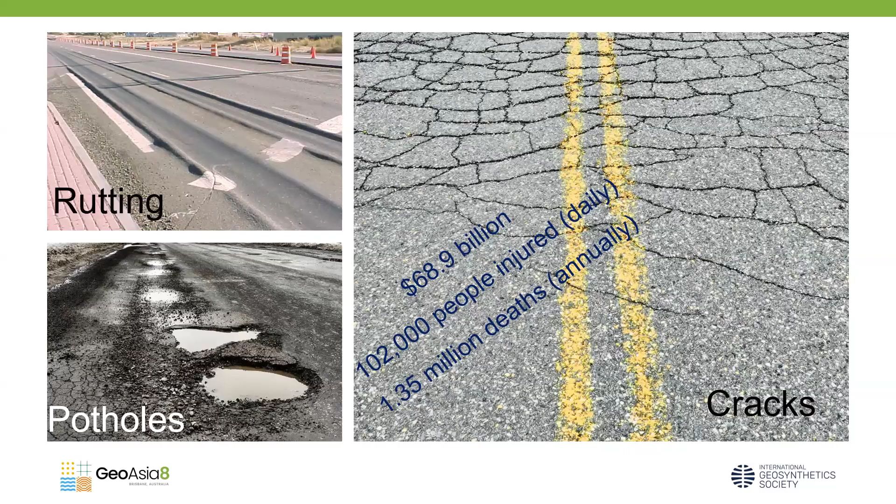And we, as engineers, have taken this responsibility to reduce this number so that people can save their life. Moreover, people can drive on these roads safely as well as comfortably without causing any issues to the riders.

So just to give you a brief idea of what people do when a road is disintegrated or deteriorated: whenever a road loses its structural capacity, a crack starts appearing on its surface. In order to rehabilitate the road, people don't go for reconstruction. What they generally do is just put a new layer of road, again an asphalt layer, on top of the cracked surface.

If you see this figure, you can clearly see that the cracks which have already been created in the existing pavement try to propagate into the overlay once the load starts coming on the newly constructed asphalt overlay or the newly constructed top asphalt surface.

So let's say a pavement is redesigned for 5 to 10 years so that it can improve the lifespan of the pavement by 5 to 10 years. But because of this movement or propagation of cracks from the bottom asphalt layer to the overlay, your road now fails within 3 years, or sometimes even in only 2 years, which causes a lot of problems for transportation engineers, because now they have to reconstruct the road again. Moreover, they have to use a lot of natural resources, which ultimately leads to unsustainability.

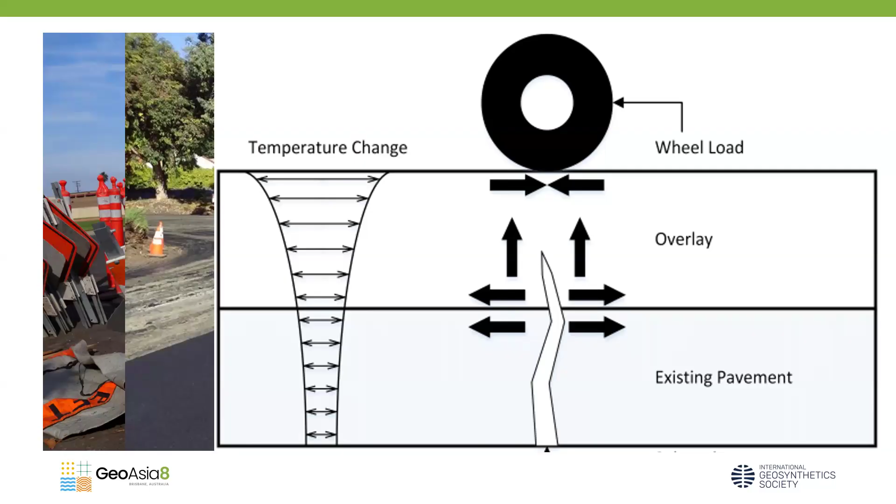So the process which actually leads to the propagation of cracks from the bottom asphalt layer to the overlay is called reflective cracking. This is the term that you might have seen a lot in research articles, as well as heard a lot from transportation engineers, who always say that because of reflective cracking, the quality of the road has disintegrated within a shorter time frame than they had actually designed their pavement for.

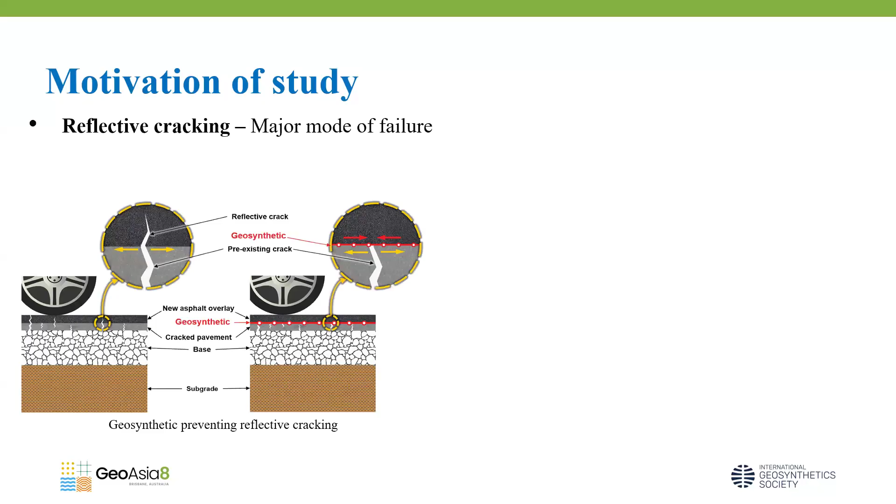So the motivation of this study actually comes from looking into reflective cracking, which is the major mode of failure. And in order to prevent reflective cracking, a lot of work has been done in the past, which includes increasing the asphalt layer thickness so that you can delay reflective cracking, or altering the asphalt mixture composition.

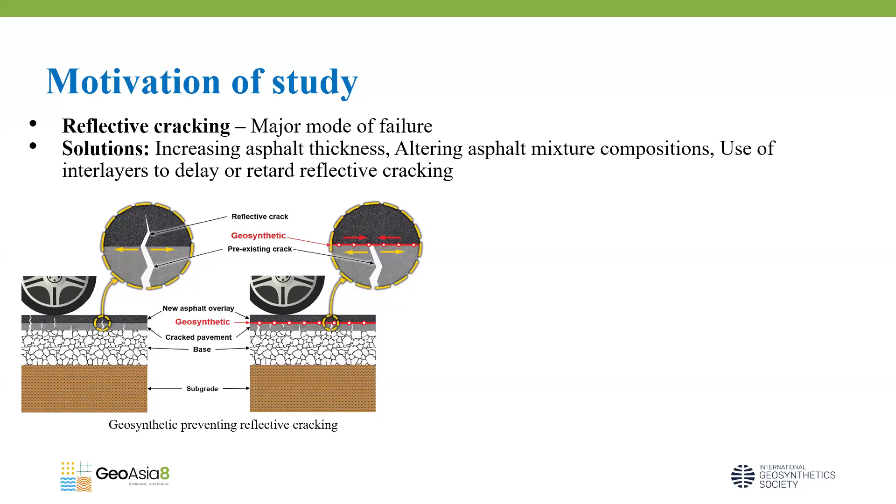Or you can use geosynthetics or paving interlayers between the bottom asphalt layer, or the existing pavement layer, and the overlay, so that you can retard reflective cracking in your pavement. The most common types of geosynthetics generally used in asphalt layers include paving fabric, which is like a geotextile, or paving grid, which is like a geogrid, to provide reinforcement.

So there are 4 different mechanisms which actually lead to reflective cracking in your overlay. First is, of course, the temperature. Asphalt is a viscoelastic material which swells and shrinks depending on temperature rise or decrease. So as the temperature increases or decreases, stresses concentrate at the location where the cracks have already been initiated, and once the swelling and shrinking starts in the asphalt layers, they try to create propagation of cracks into the overlay.

Similarly, because of the wheel load, when a wheel is moving on top of the asphalt layer, as the wheel approaches the crack, shear stresses are generated at this location. Once the wheel is directly on top of the crack, it leads to bending of the asphalt layer, ultimately leading to bending stresses at that location. Finally, as the wheel moves away from the location of the crack, shear stresses again generate in the asphalt layer, which ultimately leads to reflective cracking in your pavement.

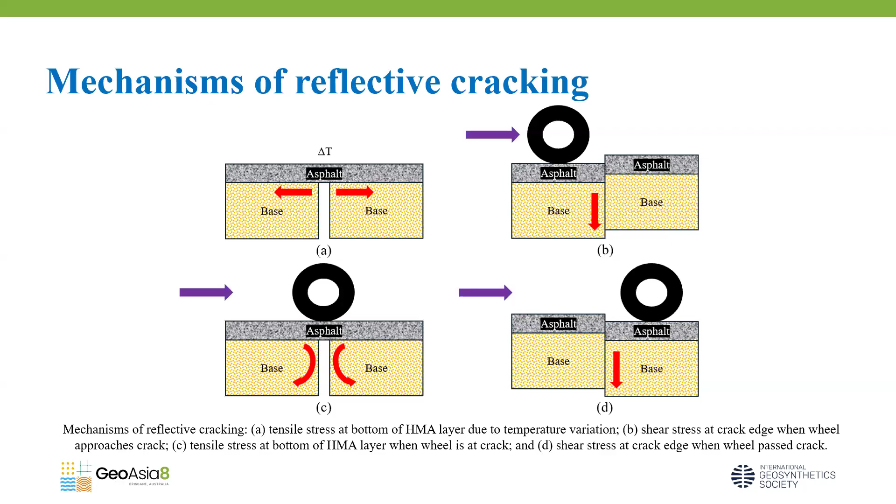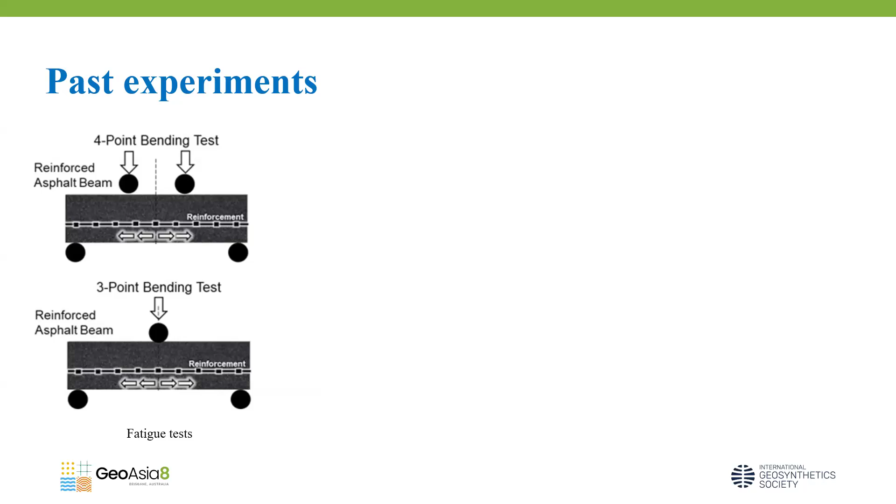So people in the past have developed a lot of tests. In your undergrad, most of you might have heard about the 3-point beam test and 4-point beam test, which are the most common tests conducted in pavement engineering in order to see the bending stresses at the bottom of the asphalt layer, which ultimately lead to reflective cracking.

Similarly, plate load tests have been conducted in the past by a lot of researchers in the field to see how the cracks propagate into the overlay. In addition, direct shear test and interface bond strength test are some of the most common tests to see the benefits provided by geosynthetics in asphalt layers.

So people have mostly studied the temperature-induced impact as well as reflective cracking caused by bending stresses or flexural loading. But almost no research has looked at whether geosynthetics can provide benefits under shear loading on asphalt layers, because as shown in our previous slide, shear loading happens almost two times whenever a single wheel pass occurs on a cracked asphalt layer. This plays a very important role in propagation of cracks into the overlay, but none of the researchers have looked into it in detail in the past.

That's what we are looking into in our research in this presentation today. The research gap we found is that limited research has been conducted where shear loads have been applied perpendicular to the reinforcement plane. Our objectives are defined such that a new test setup is developed, known as the cross shear test setup, which you will see in upcoming slides.

The setup was first standardized at different temperatures, strain rates, and interlayer conditions, since it's a new test setup designed by us. We wanted to standardize it so people in the future can use it in their laboratory without worrying about results or repeatability issues. But because of time constraints today, I won't discuss how the standardization was performed. We will just deep dive into the results, showing how geosynthetics provide benefit in mitigating shear loading.

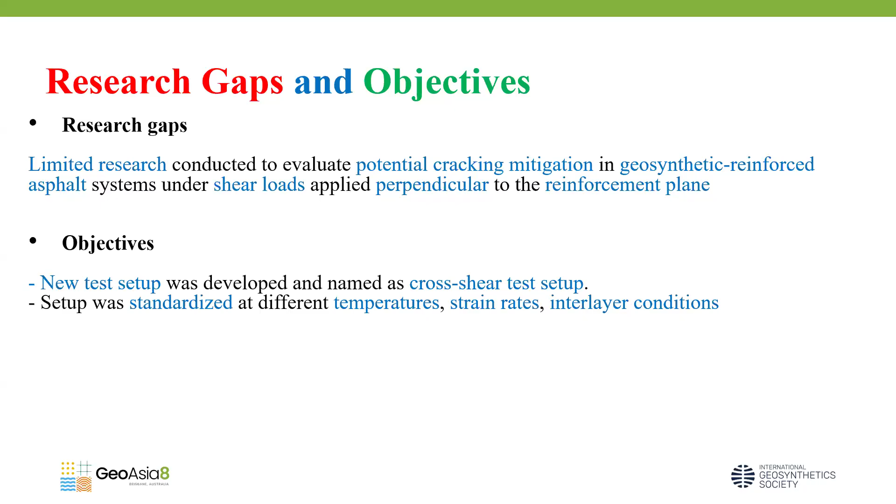Finally, the test setup is designed so it can apply direct shear loading on unreinforced as well as geosynthetic reinforced asphalt specimens. The benefits, or main objectives, are to characterize the benefits provided by geosynthetics when shear loading is applied on the specimens.

The cracking resistance potential improvement is defined in geosynthetic reinforced asphalt specimens under monotonic loading. We did tests under cyclic loading as well as dynamic loading, but because of time constraint, we will discuss only results under monotonic loading today.

And then we will use digital image correlation technique to see what is happening behind the testing we are doing. As a researcher, our task is not just to see the load displacement curve, our task is to find the mechanisms which are actually leading to the benefits provided by geosynthetics. That's our main task in this study for monotonic loading.

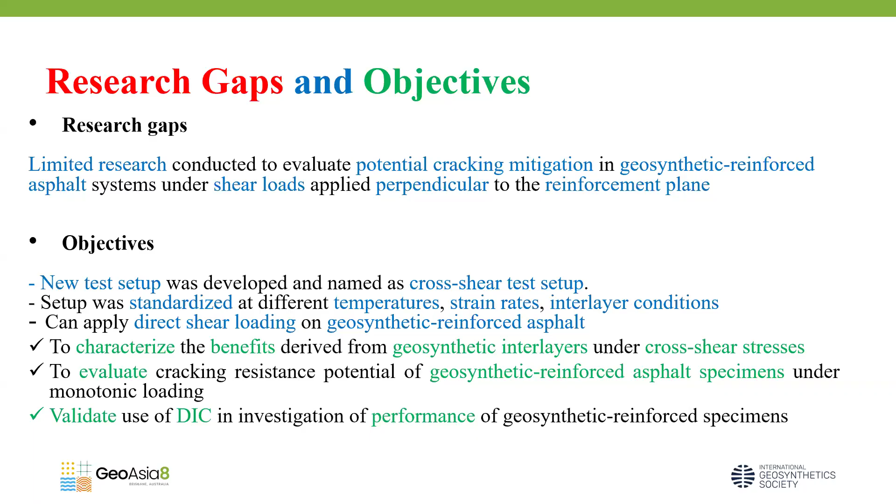So let's move to the experimental program. As you know, asphalt layers require just two things: first is your aggregate and second is your binder. The aggregates used in this study satisfied the TxDOT, Texas Department of Transportation, asphalt mixtures requirement, and the binder used was performance grade PG64-22.

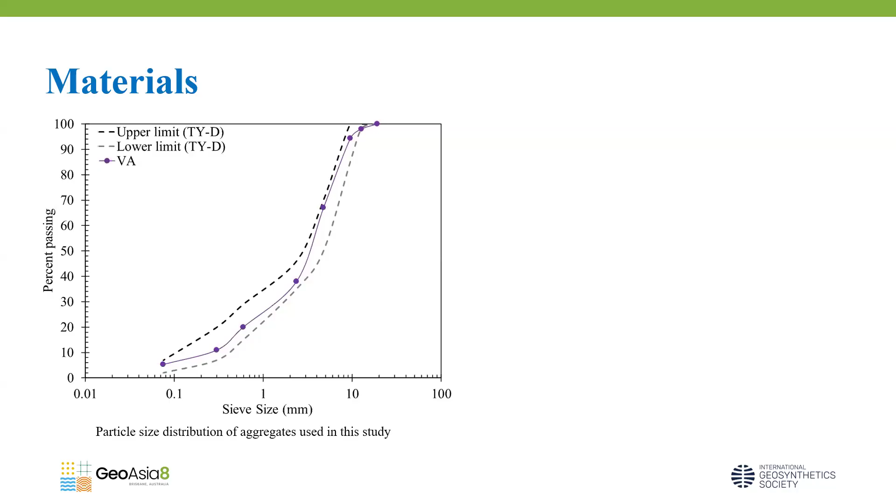I know in some countries we still use penetration grade to classify binder, but in the US, since performance grade is the most common one, that's why we used PG64-22. Three different types of geosynthetics were used in this study: polyester geogrid composite, polyvinyl alcohol geogrid composite, and fiberglass geogrid composite.

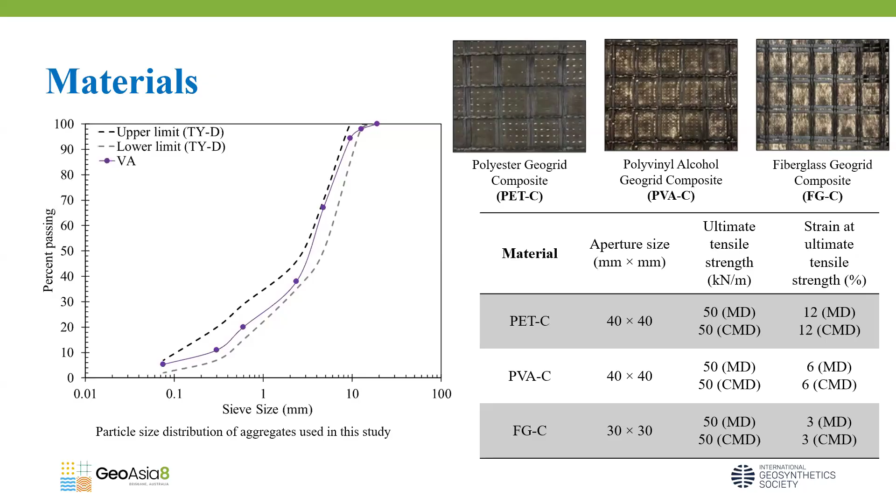The properties of these geosynthetics can be found here. As you can see, the ultimate tensile strength of all the products is almost similar. However, the strain at which these materials failed was completely different, which affected the stiffness of the products used in this study. That's why the results are going to differ, as you will see in upcoming slides.

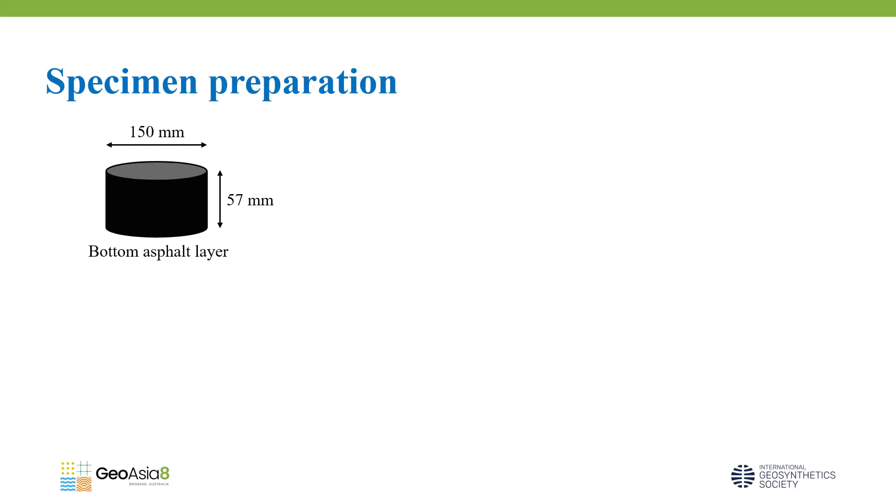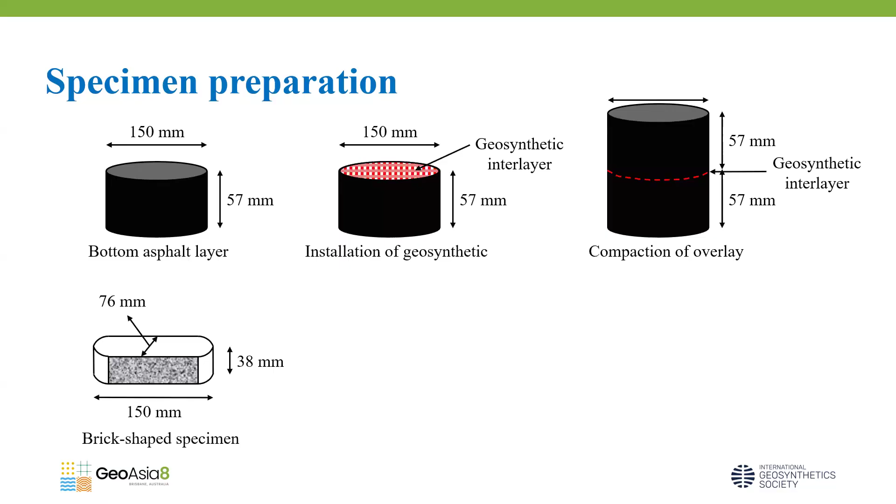Regarding specimen preparation, everything was prepared similarly to how asphalt layers are generally prepared in the field. First, the bottom asphalt layer was prepared using a Superpave gyratory compactor, with dimensions of 150 mm by 57 mm, followed by tack coat application and geosynthetic interlayer installation in case of reinforced asphalt specimens. Finally, the top asphalt layer, or overlay, was constructed on top of it. Since this prepared sample cannot be used to directly apply shear loading, it was trimmed into a brick-shaped specimen with dimensions of 150 mm by 76 by 38 mm.

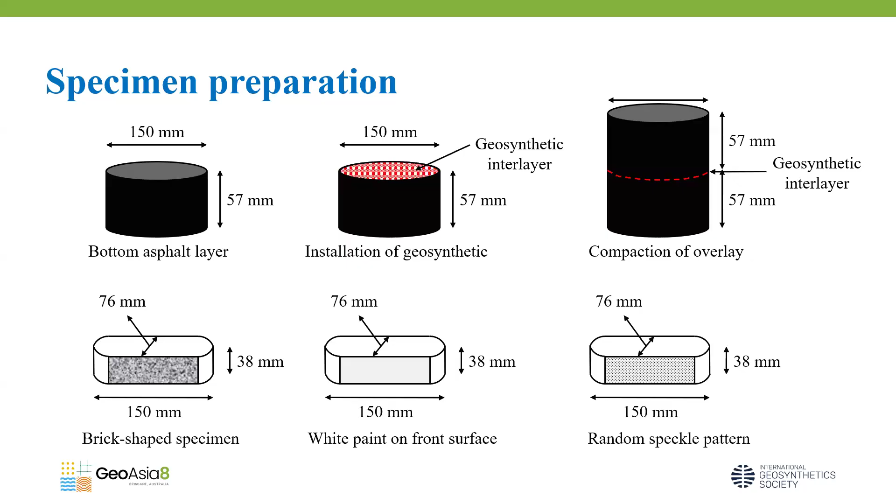Finally, to perform digital image analysis on these specimens, the front face was painted white and then a random speckle pattern using black dots was created on the front face, so that images of this random speckle pattern can be collected and compared with the undeformed image to see how stresses and strains are generated in our specimens without even touching the specimen.

A lot of trial and error has been performed on this setup before calling it one of the best setups for evaluating the shear resistance of geosynthetic reinforced asphalt specimens. You can read more about that in one of my papers on standardization.

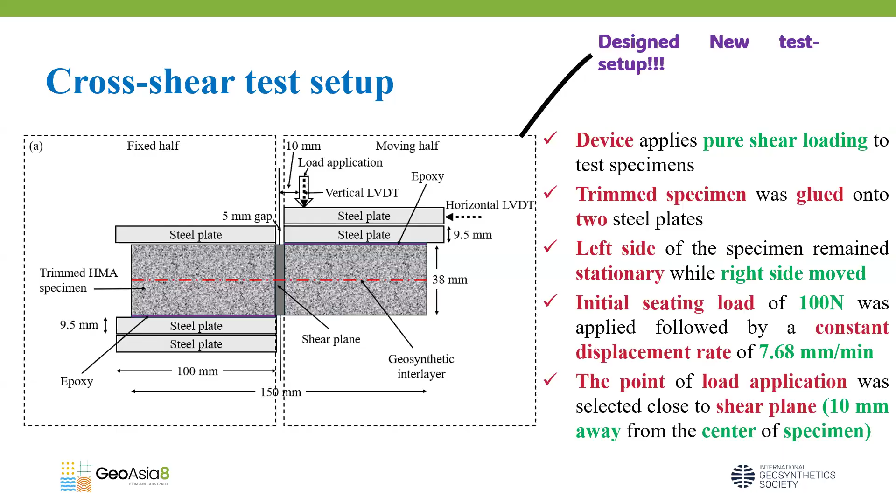The initial seating load for monotonic loading was kept at 100 Newton, while a constant displacement rate was applied on these specimens at about 7.6 mm per minute. The point of load application was also chosen at about 10 mm away from the center of the specimen.

For the digital image correlation technique, as you can see here, the specimen has a random speckle pattern on its front face. We used an open software called DigiCam Control software to collect images at regular intervals of about 3 seconds.

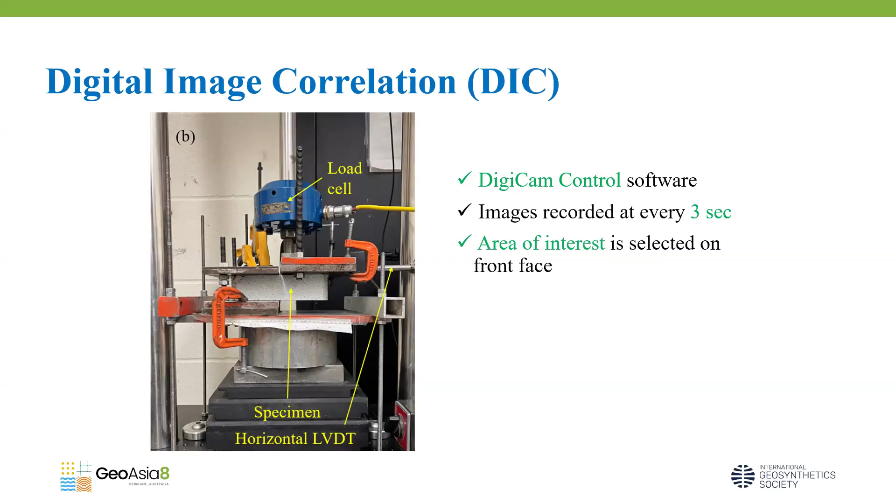If you want to repeat these tests in your laboratory, you can change the recording time by 1 second as well. The area of interest was chosen on the front face of your specimen, and then a commercialized software called Vic2D was used to analyze the images.

If you are a geotechnical or transportation engineer planning to use DIC and you do not have a commercial software available, you can use an open software called NCorr. So there are both open and commercial software options available to analyze all these images.

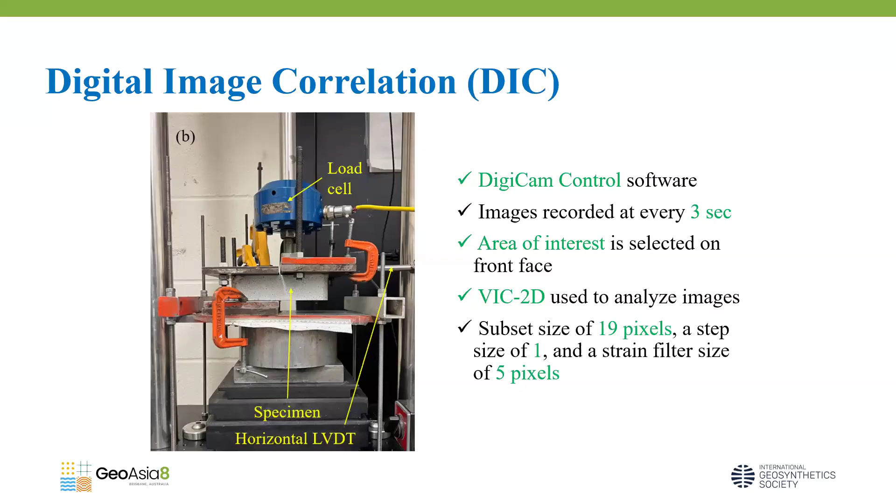In my case, I used a subset size of 19 pixels, a step size of 1, and a strain filter size of 5 pixels. A subset size means your image is divided into different pixels, representing the smallest pixel dimensions used to compare your deformed images with respect to your undeformed images, so you can see how much displacement has happened with respect to time or loading.

Now let's move to the results and discussions, now that you understand what the system is and how it works.

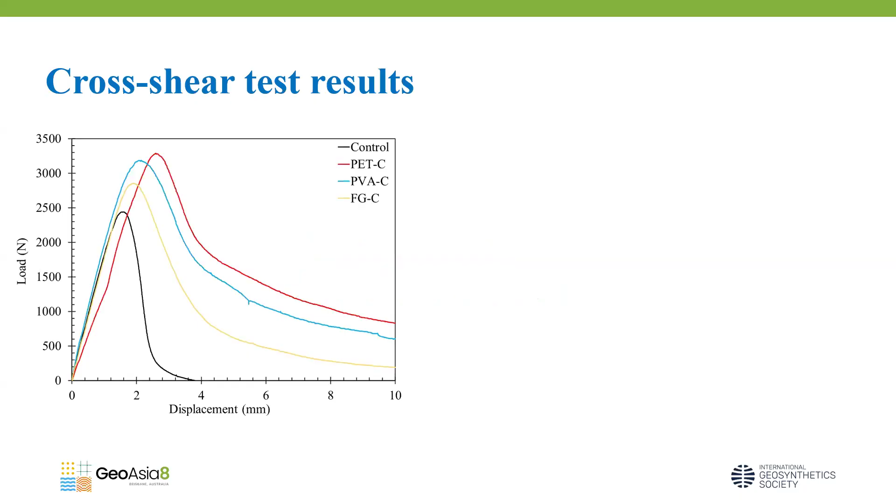So this is the load displacement curve that any engineer needs in the field. All the geosynthetics provided benefits in improving the load carrying capacity, that is the shear resistance of the pavement, as well as in delaying crack initiation, that is the resistance at the peak load. Then we used some analytical models to verify the benefits provided by these geosynthetics.

Moreover, if you look at the load displacement curves closely, there is some residual strength provided by the geosynthetics, which you won't see in unreinforced cases. In unreinforced cases, as soon as the crack initiated at the peak load, you see a sudden drop in the load carrying capacity of your pavement, and hence your pavement becomes unusable.

But in geosynthetic reinforced asphalt specimens, the benefits are still there once the crack has initiated, and you can take advantage of this mostly in colder climates. When the temperature is super cold, the asphalt is strong but brittle in nature, so the asphalt layers crack suddenly, but if they have geosynthetic in them, the crack is dissipated over a longer period of time.

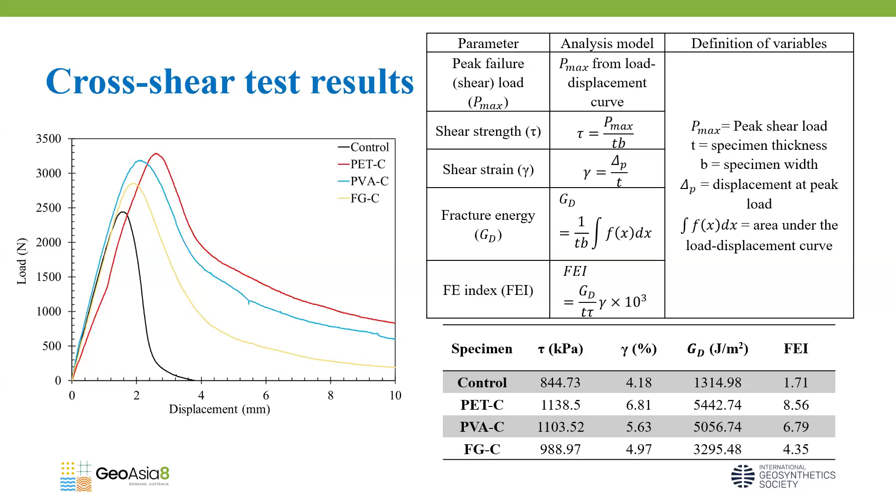Moreover, even after the crack has initiated, there is some residual strength in your pavement that can take the load coming from the wheels on top of it.

If we go to the DIC analysis in order to see the mechanism behind it, I will show you the area of interest that we selected on our images.

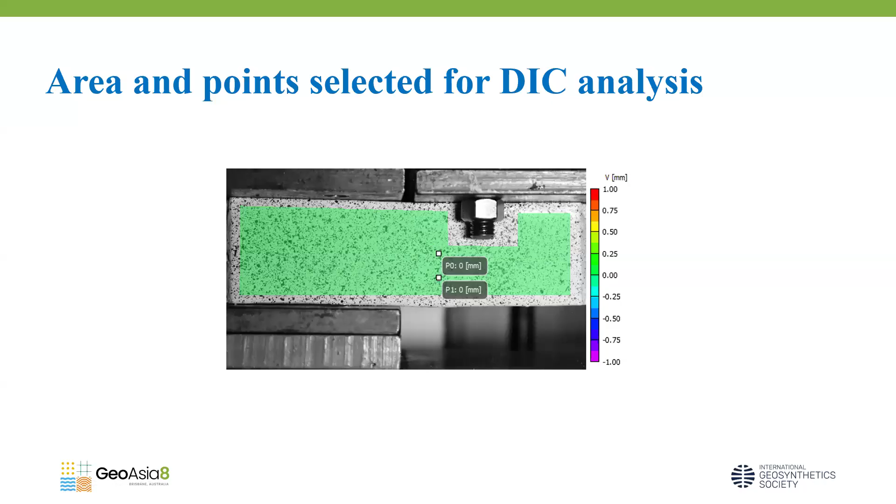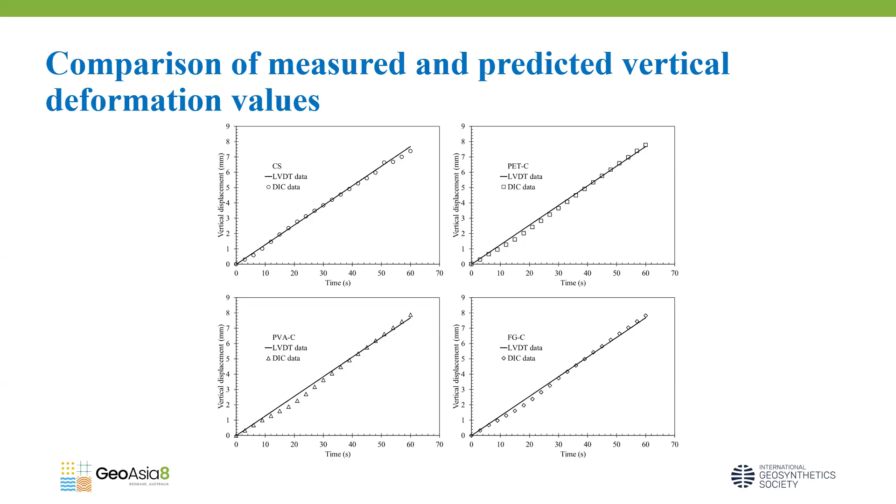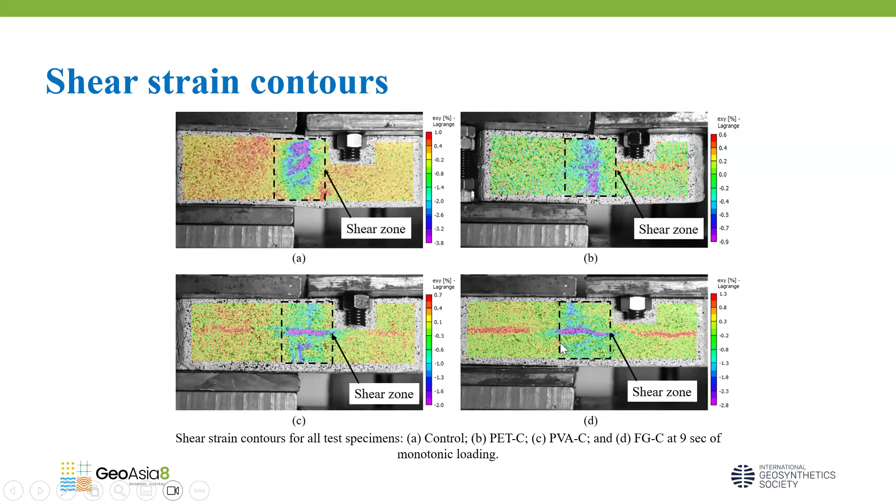Why am I showing you the results at 9 seconds of monotonic loading? Because in the next image, the control specimen was broken completely, so I'm showing all images at 9 seconds. In reinforced specimens, no crack has been initiated. At 21 seconds of monotonic loading, the control specimens are completely fractured, but in reinforced specimens the crack has just initiated. So both crack propagation and crack initiation are delayed by the presence of geosynthetics, which is a great benefit under shear loading.

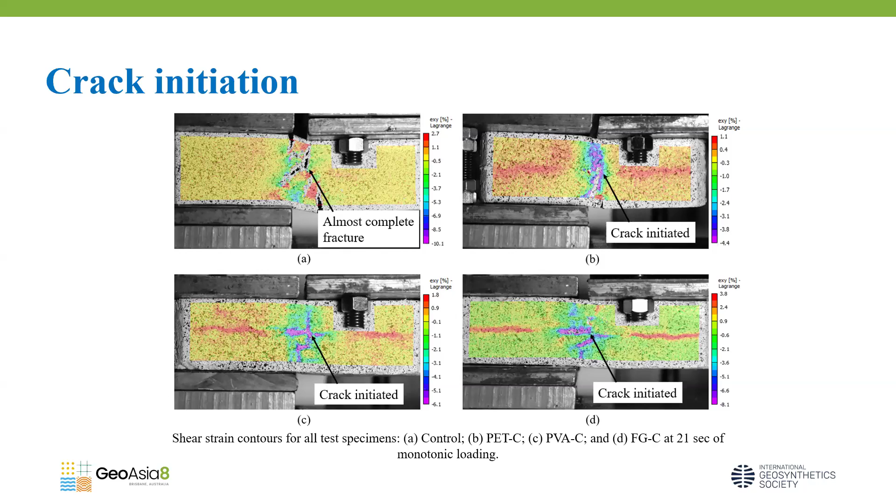Looking at crack propagation, in control specimens the crack initiated either from the top edge or from the bottom of the specimen and then propagated toward the center. But in reinforced specimens, because maximum shear strains are generated along the geosynthetic location, the cracks initiated at the center location and moved away toward the edge of the specimen.

This has another benefit: when a crack initiates from the top, moisture infiltrates into the pavement and damages it rapidly. Similarly, if the crack initiates from the bottom, it travels toward the top very quickly and damages the pavement within a short time. But when the crack initiates from the center location where the geosynthetic is located, you now have enough time to repair your pavement or even delay its complete failure.

So these are the benefits provided by geosynthetics, and the mechanism we found from these images is that geosynthetics mobilize or absorb the strain coming onto them and redistribute it over a wider area, thus improving the shear resistance of the pavement.

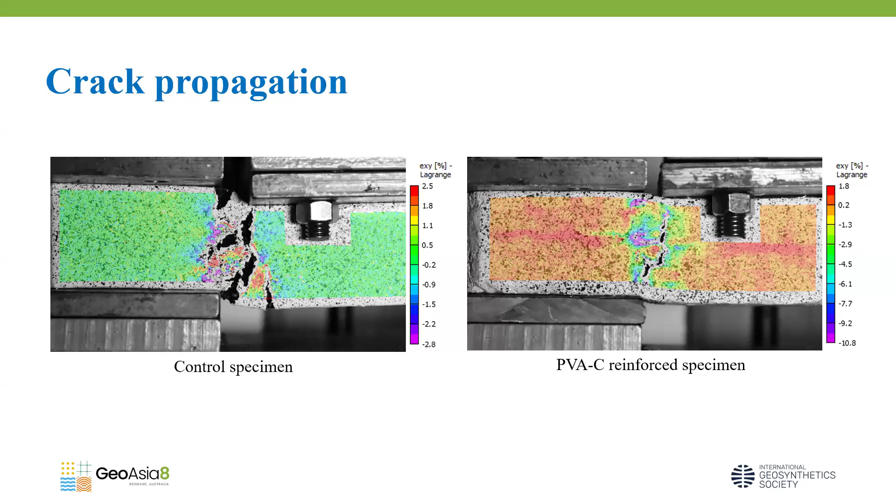So from this study, we can conclude the following points.

The cross shear test has demonstrated that all geosynthetic reinforcements have provided benefits in improving the shear resistance of pavement. Among the interlayers used, the polyester geogrid composite provided the maximum benefit with a fracture energy index of around 8.56, followed by PVAC and FGC geosynthetic.

The DIC technique was found to be effective in defining the mechanism which ultimately led to the improvement in shear performance of reinforced specimens. In monotonic loading, at 9 seconds of loading, the shear strains were as high as 3.8% in control specimens, while in reinforced specimens they varied from 0.9 to 2.8% only, providing similar benefits to those we have seen in laboratory testing.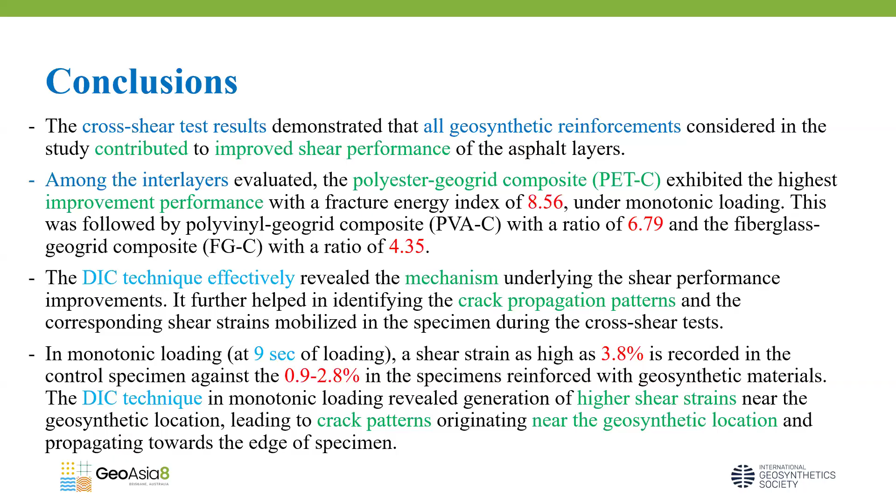The test results indicate that reinforced specimens failed at higher loading time, meaning they needed higher displacement in order to fail, thus delaying crack propagation or helping mobilize the shear stresses coming on the geosynthetic reinforced specimens. So in summary, we can conclude that geosynthetics provide benefits in improving shear resistance, and hence they can be used in the future on asphalt layers to improve structural capacity or to retard reflective cracking in pavements.

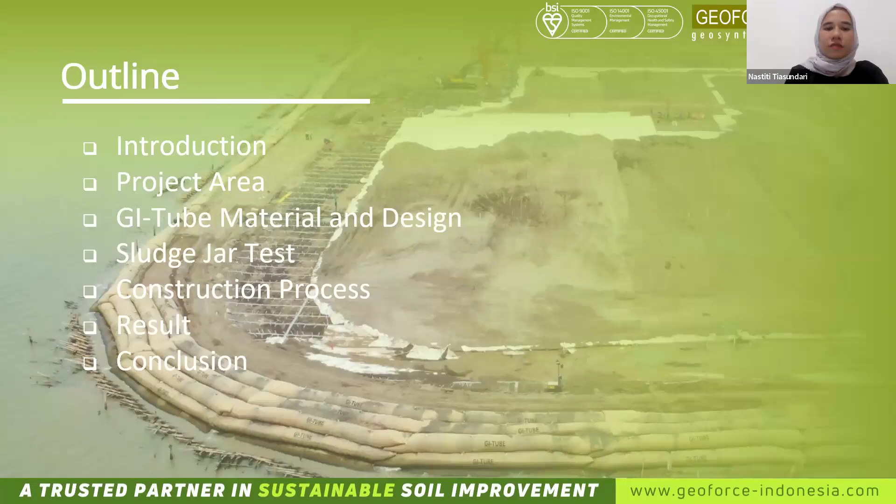As you may all know, Indonesia is a very big country consisting of many islands, approximately 17,000 islands, including major ones like Sumatra, Borneo, Sulawesi, Papua, and Java. Because of that, Indonesia has over 99,000 kilometers of coastline with a combination of sandy, muddy, rock, and other structures, and almost all of them have a risk of coastal destruction due to abrasion. Because Indonesia is a very big country, I'll focus my research on Java Island, which is one of the most populated islands in Indonesia.

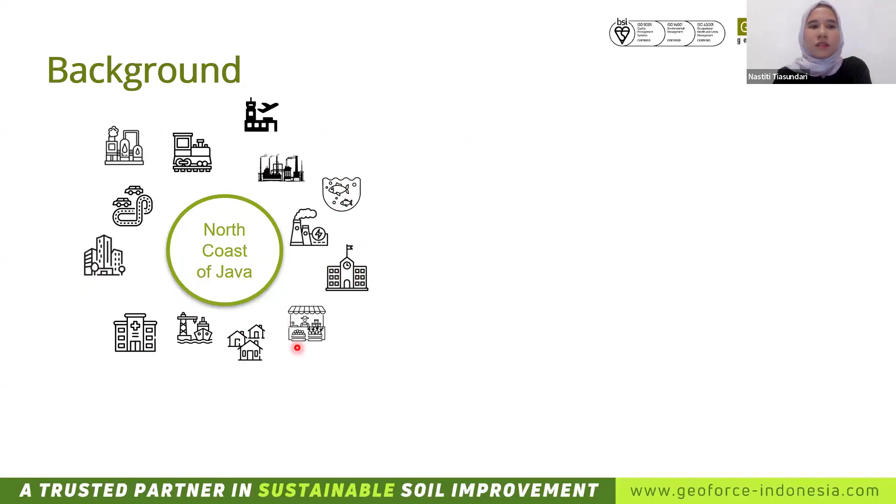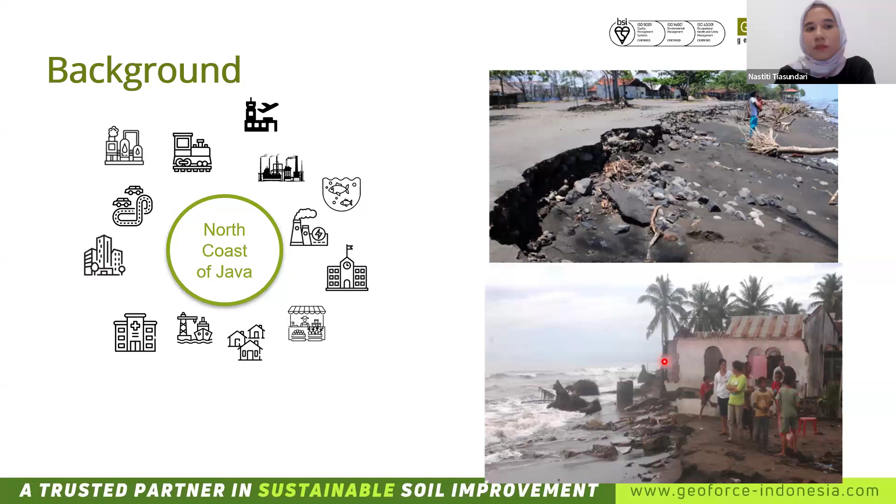So how can we overcome this? Especially, as I mentioned before, there are many types of shorelines, especially muddy coastline, which is well known for its problematic condition because it consists of soft deposits. So how can we overcome coastal abrasion in muddy coastline? Actually, there are many solutions you can do. The first one is making structures like seawalls, breakwaters, groins, revetments, or other structures.

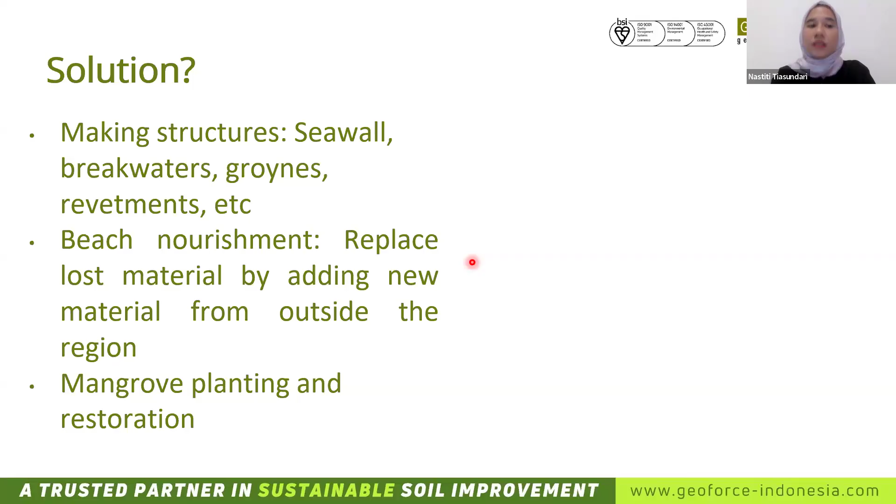The second solution is beach nourishment, by replacing lost materials with new materials from outside the region. The third is mangrove planting and restoration of mangrove forests. But how about a solution that achieves all three things at once, by using GI tubes or geotextile tubes as a low-crested breakwater structure? How is that possible?

And the second thing, we can do beach nourishment. How is that possible? Because the GI tubes serve as a low-crested breakwater, when the high tide happens, the wave will overflow the GI tubes and form deposits behind the structure. The deposits will be trapped and form deposit accretion, resulting in increasing the shorelines. That's number two. We don't need to add new material from outside the region; it actually forms naturally from the process.

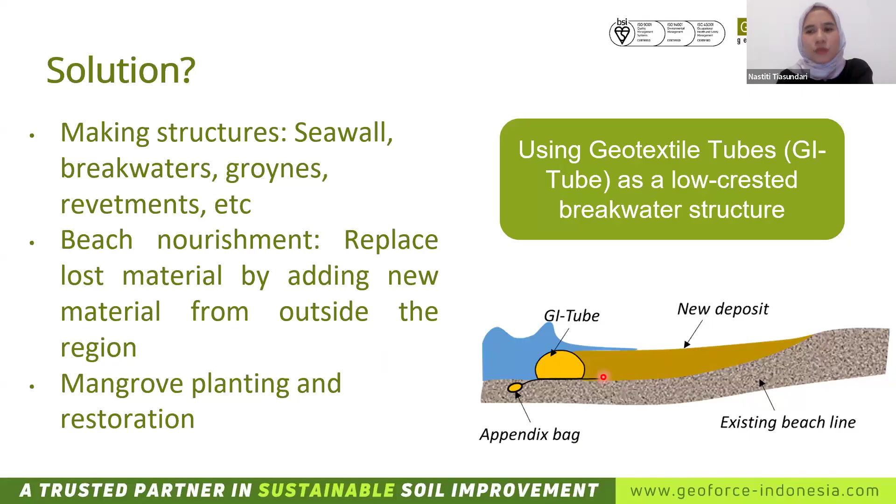And the third, mangrove planting and restoration: because the GI tube serves as a low-crested breakwater structure, it will reduce the wave energy coming to it. So the wave energy behind the structure will be relatively low and stable, making it easier for mangroves to sustain, creating an ideal environment for enhancing mangrove growth.

How are we going to build this geotextile tube structure? Basically, geotextile tubes are made of geotextile material, and you can fill them with any kind of material: sand, slurry, mud, tailings. The ideal material would be sand, because it fastens the filling process, settles quickly, and has less dimension reduction due to settlement, since it's a very ideal material.

But because we are dealing with coastal abrasion on a muddy coastline, it's hard to find good sand for filling, and we'd often need to transport sand from outside the region into the coastal area. Since it's not easy to find sand, we are going to use locally sourced slurry to fill the geotextile tubes. How can we do that?

Slurry consists of small particles of fine clay. You could just fill the slurry directly inside the GI tubes, but this causes a problem: the installation time would be very long, and due to this longer process, a slurry cake will form inside the geotextile tubes. This decreases the dewatering ability, so you won't get the optimum height of the geotextile tubes that you want.

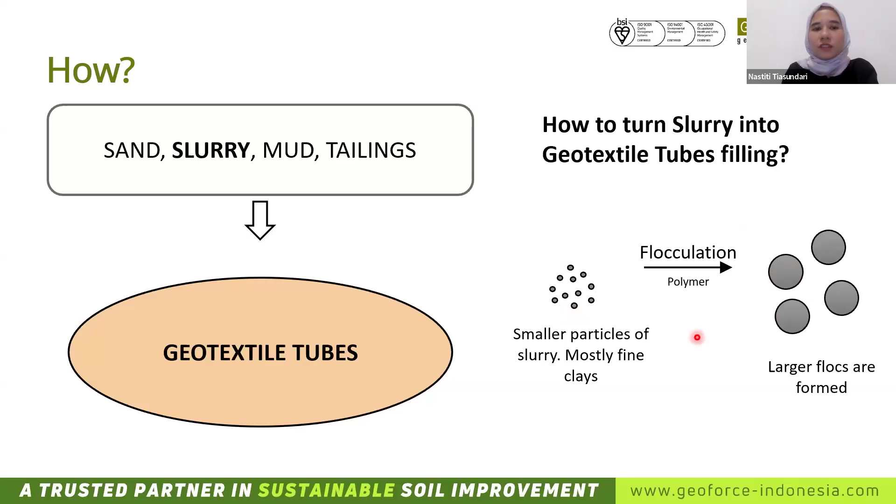So we need to form larger flocs quickly using a flocculation process aided by polymer. The idea is to pump the slurry into the geotextile tubes, but faster, forming larger material by doing flocculation during the pumping of the filling.

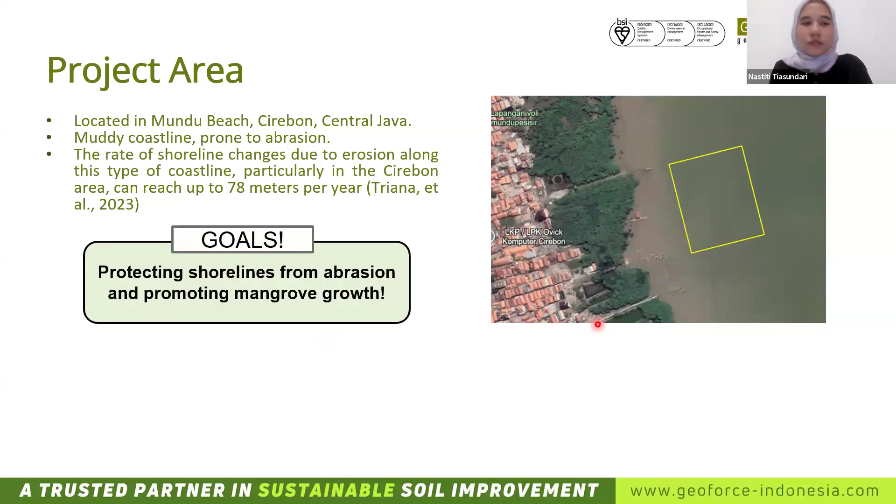So the goal here is to protect shorelines from abrasion while also promoting mangrove growth. The problem is that in this area it's not easy to find good sand as filling material, so we need a solution to fill our geotextile tubes with locally sourced sludge. The solution is sludge-filled geotextile tubes, which from here on I'll just address as GI tubes.

This is the design we are using: GI tubes with a 5 meter circumference and 1.3 meter design height, since it will be filled with slurry. There will be some settlement and consolidation, estimated around 0.4 meters, so the final height is estimated to be 0.9 meters.

This is something you have to predict when using slurry: you won't get the full 1.3 meter design height. You also have to consider the settlement that will happen to the filling inside the GI tubes.

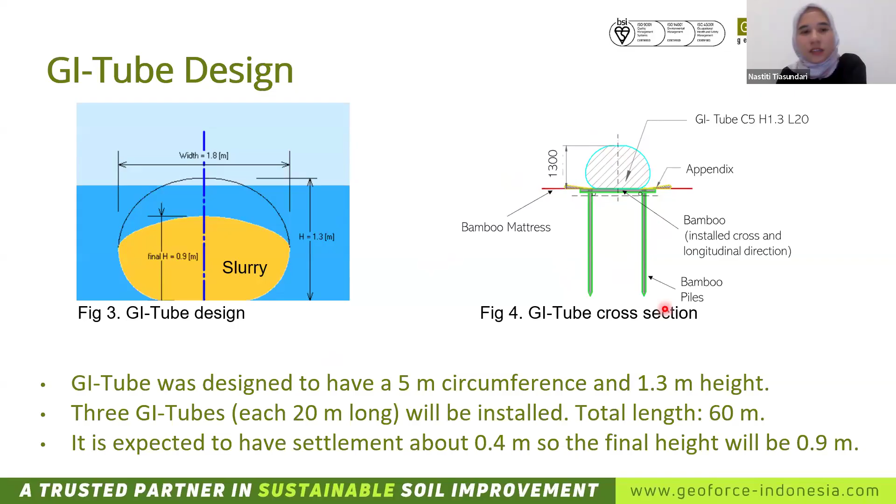Because this area has very soft deposits, we are going to first install bamboo piles, 3 meters deep, only for the platform. We also install bamboo mattresses, and on top of that, an apron structure to prevent scouring, made from the same material. On top of that we have the GI tube structure. Each GI tube is about 20 meters long, and 3 GI tubes will be installed, for a total length of 60 meters.

Okay, this is the look of a typical installed GI tube. So we are using special material here, a double-layered needle punch staple fiber polypropylene geotextile, with a white layer and a beige layer.

Why we are using this type of material is because it has a very good permeability ability, while at the same time it has a very small opening size, and the tensile strength is about 60 kilonewton per meter. So we are hoping this material, this structure, could retain the sludge inside and not allow the slurry or the sludge or the small particles to go outside of the structure.

But the problem is that slurry contains fine clay, smaller than 2 micrometers, which is obviously smaller than the opening size. So we need to do the flocculation process to make bigger flocs. Prior to the project, we did the sludge jar test in the lab to find out the right dosage, the right formulation to use at the site, because we need to find the optimum formulation.

The polymer that we are using here is anionic polymer type R1001, and we are going to use 0.2% concentration. This is the properties of the polymer.

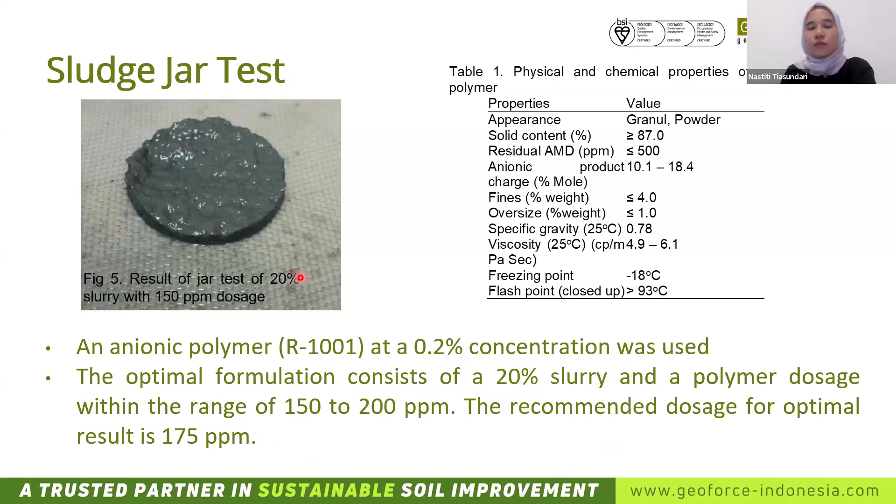So this is the construction process. We have to make this kind of setup on site. In the middle is the area for the GI tubes. This is already installed bamboo piles, and it's already installed bamboo mattresses. On the left side, we have this flocculant mixing tank.

This is where we are going to dilute the concentrated polymer into 0.2% concentration. On the right one, we have the slurry holding container to condition the slurry to meet the criteria, which is 20% slurry. And this is the schematic that we are doing.

We are diluting the concentrated polymer using seawater to reach 0.2%, and we are going to pump it using the dosing pump here to meet around 150 to 200 ppm. On the other side, we are going to condition the slurry to meet the 20% slurry criteria.

We contain it in a slurry holding container, and it will be pumped in using the slurry pump, and they will meet at the static pipe and will be pumped directly to the GI tubes.

So what happens here is that the turbulence from the flocculation process actually makes bigger flocs. By using this kind of method and the high pressure pump, the turbulence and pressure generated during pumping will facilitate the formation of floc particles within the GI tube. So the floc particles will form inside the GI tubes when we pump these two materials together.

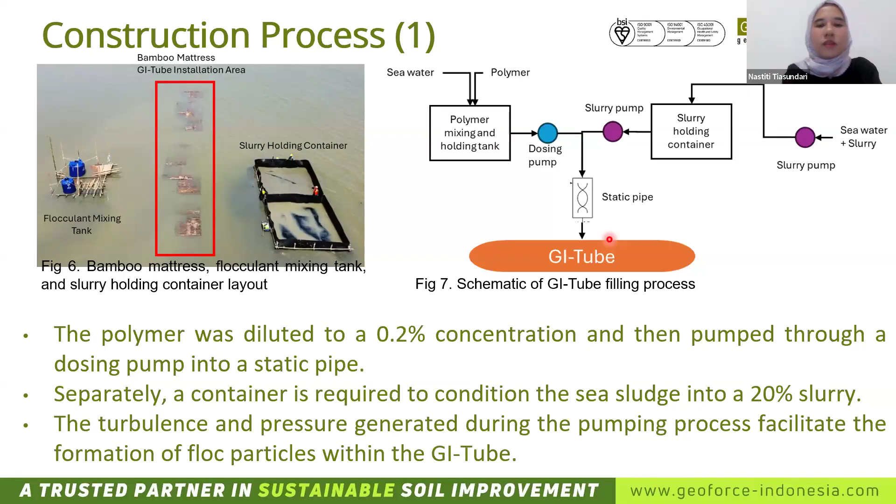The construction process consists of 3 filling periods. The first one is initial filling. We are going to fill until the design height, let it dewater, fill it again and let it dewater, and then do the final filling and let it consolidate.

On the right is the picture when we are doing the filling. This is the first GI tube, and the next one is the second GI tube. We are going to fill this one, let it dewater, then fill this one and let it dewater, going back to the first one, until we reach the final height of the second refilling, and we let it consolidate.

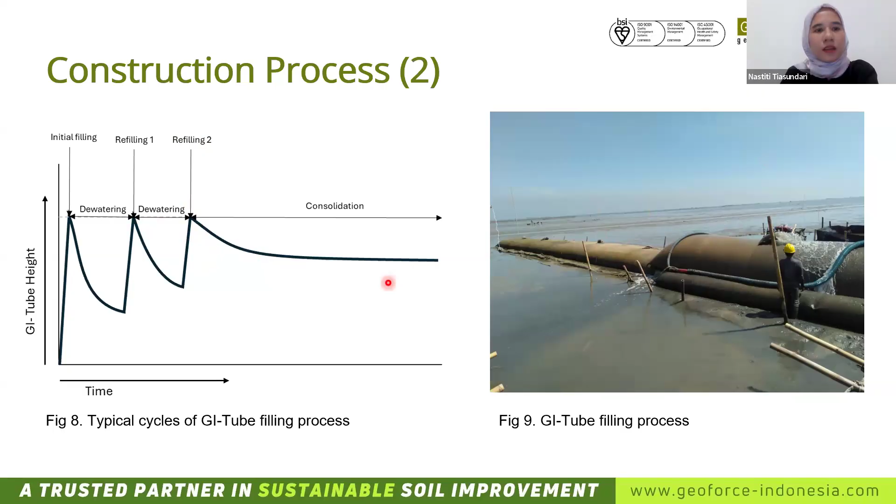This is the result, the settlement of the GI tubes. The final height of installed GI tubes actually ranges from 1.3 to 1.4 meters. This is normal when constructing GI tubes - it sometimes goes higher than your design. It's normal, and we have here 1.3 to 1.4 meters.

As you can see in the graph, it progressively has settlements, and unfortunately we only monitored it until 100 days. At 30 days the height decreased about 84% from the original height, at 60 days it decreased to 69%, to about 1 meter, and after 100 days the height decreased to 61% of the original height, resulting in a final height of about 0.8 to 0.9 meters.

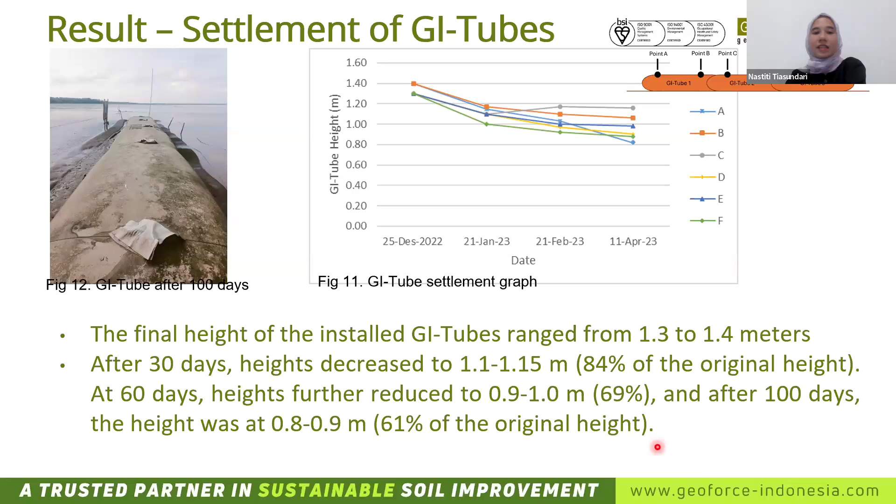So it's not much different from the design. This is the thing you have to keep in mind if we are going to use this kind of system: we have to allow for the structures to consolidate, and we have to realize that there are going to be settlements of very high magnitude. You are expecting around 40% reduction in height. That is the thing you have to keep in mind.

The next result is the performance of the GI tubes. On the left, you can see how water discharges from the GI tubes. The double-layered geotextile material actually has very good performance in dewatering sludge within the GI tubes. As you can see in the picture, only clear water comes out from the structure, meaning no particles escape. So the structure contains the sludge very well, only allowing the water to come out.

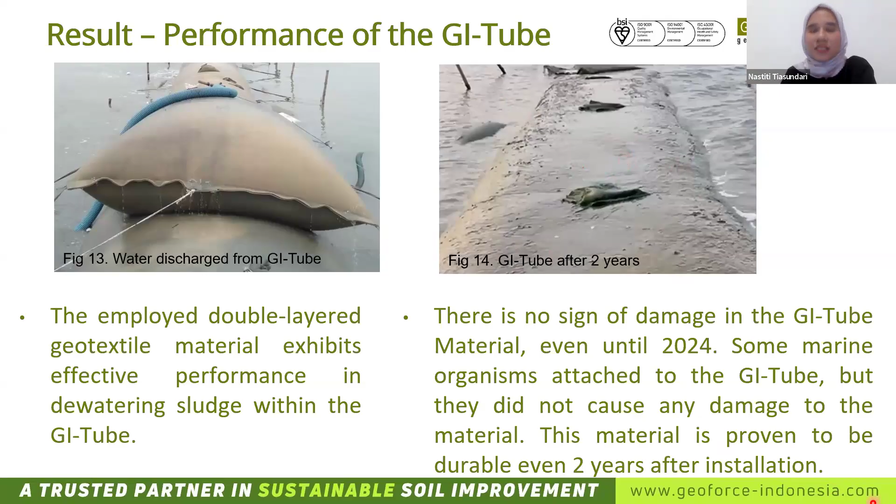The second observation is that after doing some inspection, we found no sign of damage. We did this in 2024. Although not very clear in the image, there are some marine organisms attached to the GI tubes, but they did not cause any damage to the material. If you look at it from Google Earth, you can still see the material formed very well. So it is proven that the material is still durable even after 2 years.

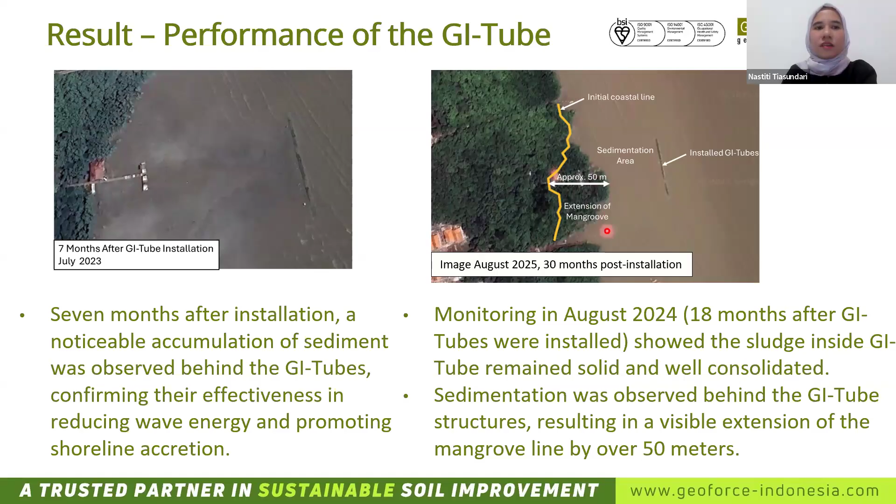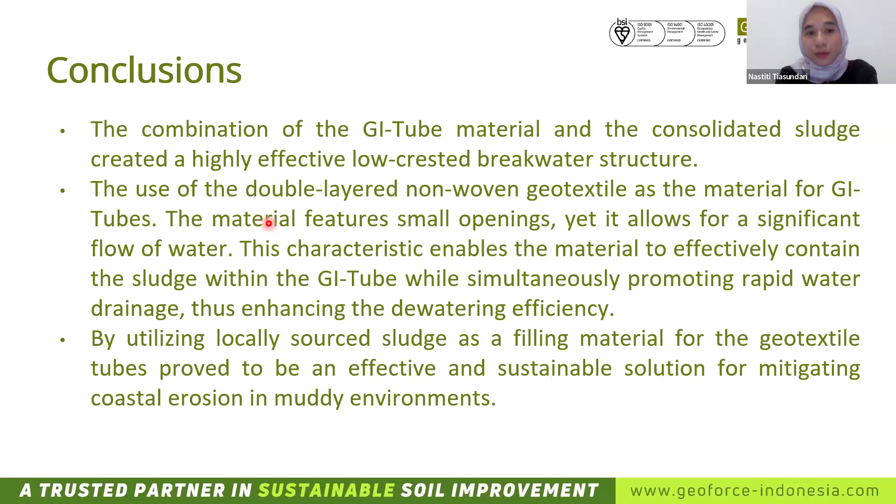So this is the conclusion. First, the combination of the GI tube materials and the consolidated sludge created a highly effective low-crested breakwater structure. Second, the double-layered non-woven geotextile GI tube material is very good — it has characteristics that enable it to effectively contain the sludge within the tubes while promoting rapid water drainage, giving good dewatering efficiency. Third, by utilizing locally sourced sludge, we can have a sustainable solution for mitigating coastal abrasion in muddy environments. I think that's all.

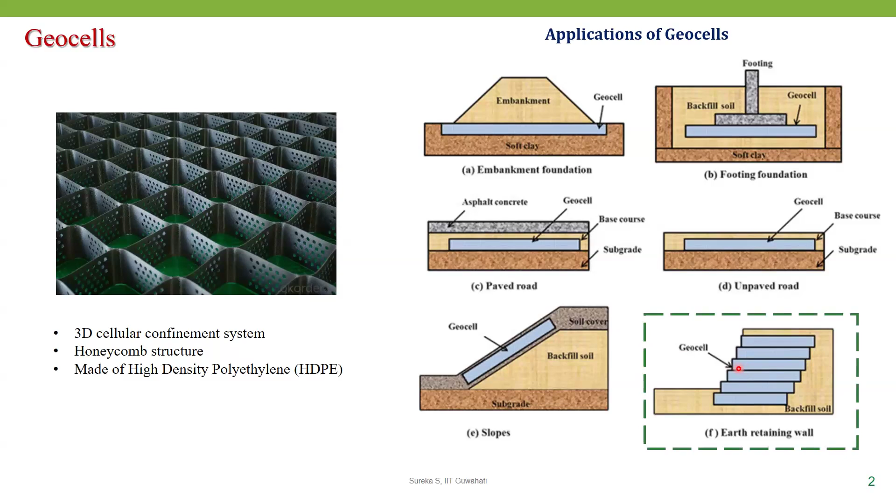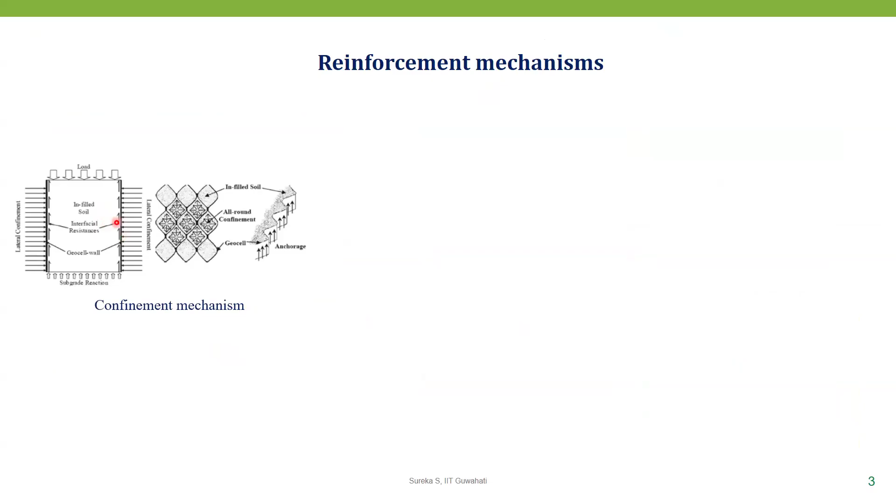There are different reinforcement mechanisms for geocells. The first and most important is the confinement mechanism, where the vertical walls of the geocell pockets provide confinement to the infill soil.

The second is the membrane mechanism, where the soil-infilled geocell layer under tension gives a membrane effect upon bending.

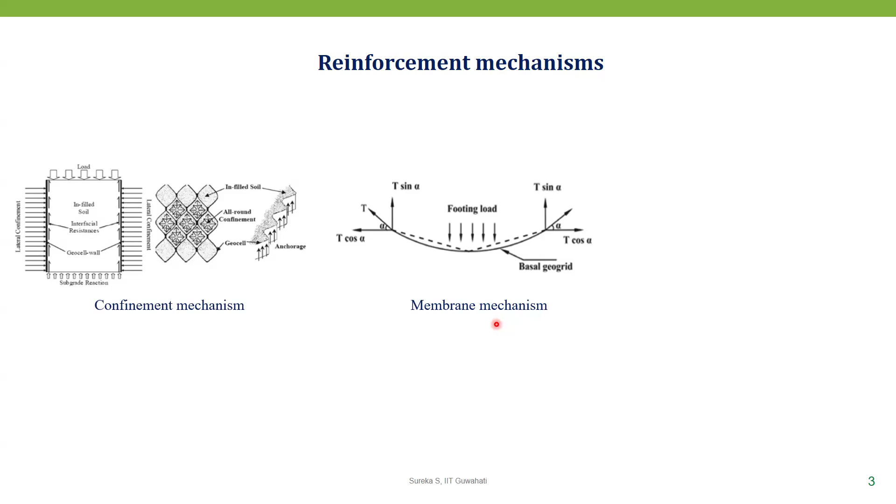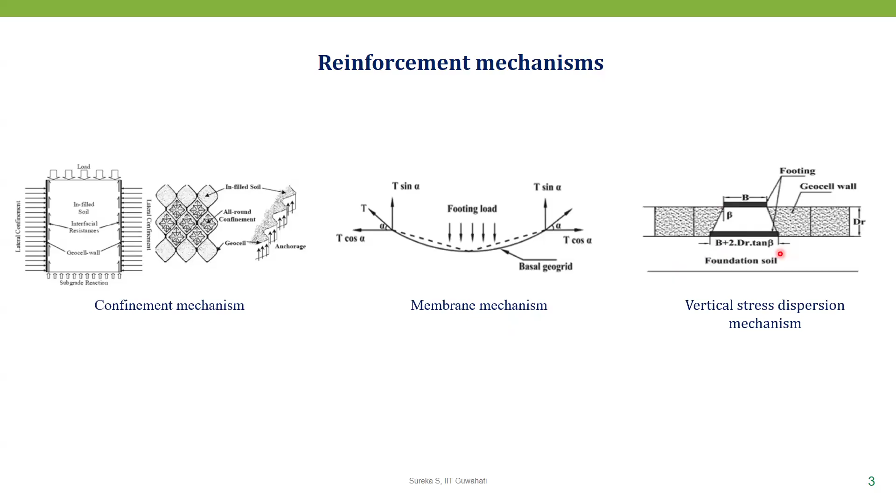The third is the vertical stress dispersion mechanism, where the applied vertical stress is dispersed to a larger area, and hence the stress magnitude is reduced. These are the three important reinforcement mechanisms of geocells.

This acts as a retention system. These tests are conducted on the shake table, where artificial earthquakes are simulated.

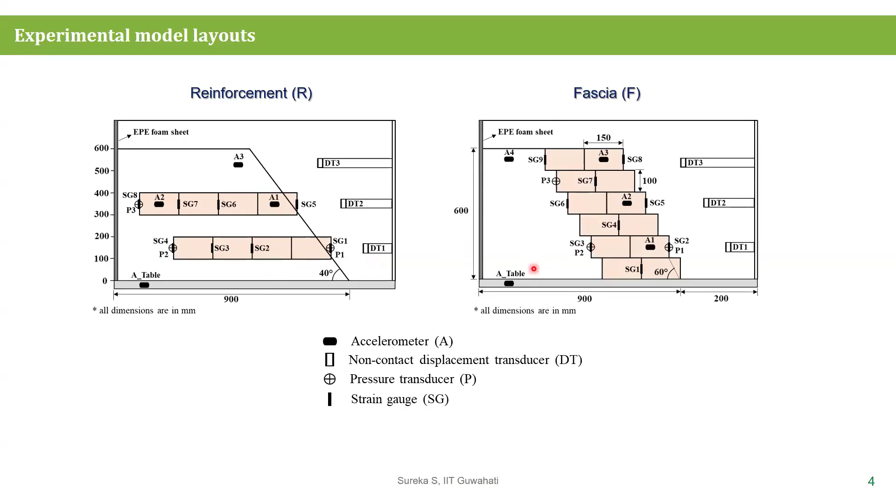The responses are recorded using various instrumentations. We used a piezoelectric accelerometer for acceleration response, and the displacement of the model faces are recorded using non-contact laser displacement sensors. Lateral earth pressure exerted by the backfill and the infill soil is recorded using pressure transducers, and the tensile strain developed in the geocell walls due to applied seismic loading is recorded using strain gauges.

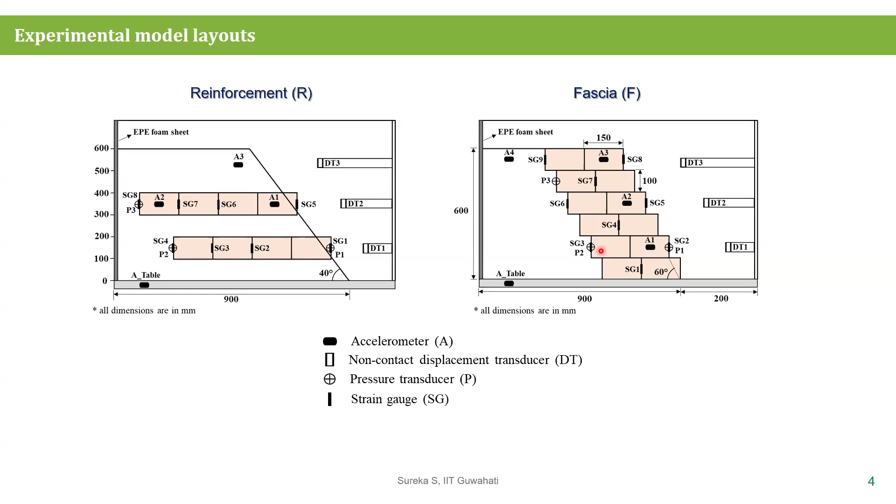Locations are given in this model layout. This is the shake table setup available at IIT Guwahati. It has a loading platform of size 2.5 by 2.5 meters with a payload capacity of 5 ton.

It has a stroke limit of plus or minus 500 mm, so in total it can move up to 1000 mm. It has an acceleration range of plus or minus 2g with a frequency range of 0.5 to 10 hertz.

On this shake table, one perspex tank, as shown here, is fixed using a rigid connection, and inside that the models are constructed. The perspex tank size is 1200 by 600 by 1000 mm.

The rear wall has a styrofoam sheet which helps reduce wave reflections in the model, and the front wall is left open for ease of construction of the models.

One of the side walls is marked with a 5 centimeter mesh for post-processing and visualization, so we can measure the deformation of the model using these markings as a reference. The tank base is covered by sandpaper in order to induce friction at the model base.

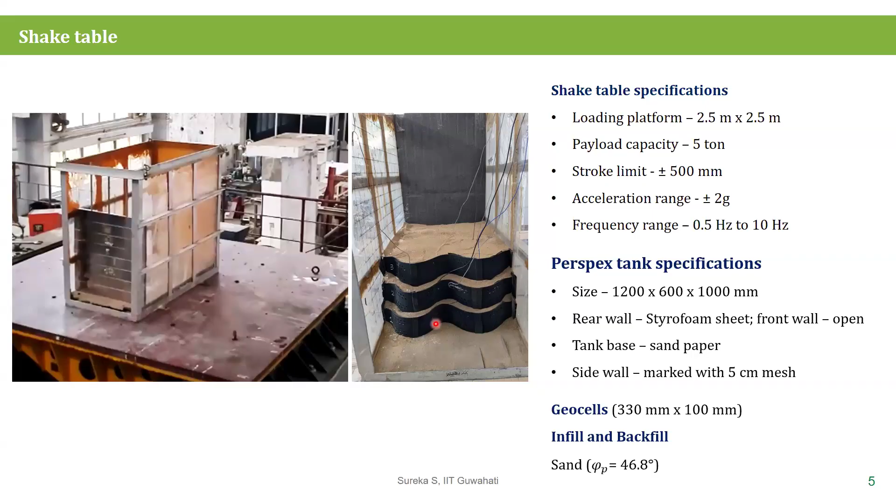There are various geocell sizes available in the market. For experimentation purposes, we used a 100 mm cell height and wall length of 330 mm.

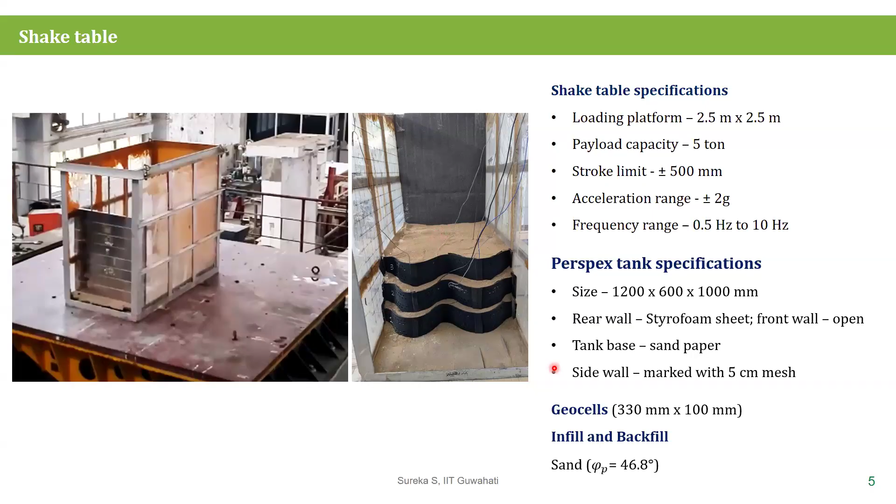Both the infill and backfill, meaning the sand inside the geocell pocket as well as the mass retained by the geocell fascia, are composed of sand with a peak friction angle of around 47 degrees.

We gave multiple seismic motions as well as sinusoidal motions to the models. Here I'll discuss two earthquake motions: Indo-Burma and Northridge. Indo-Burma has the least PGA of 0.08g, and Northridge has a high magnitude PGA of 0.56g.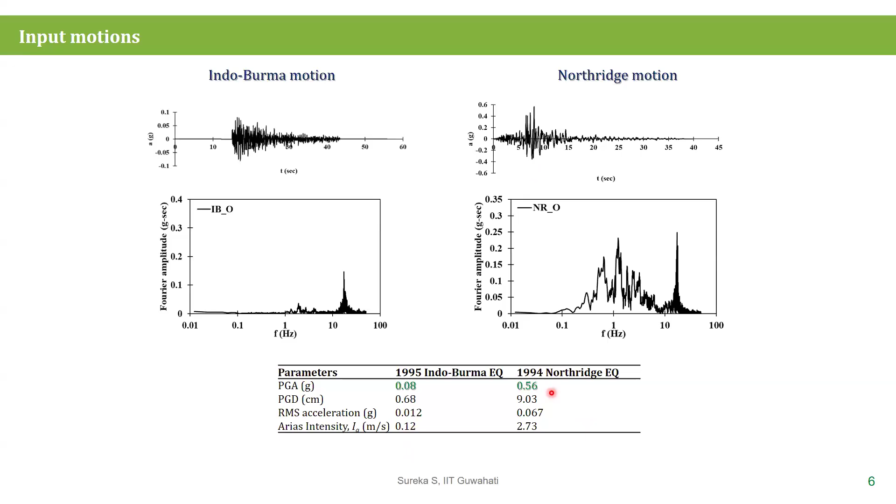This is fed to the shake table. In general, the input fed to the shake table and the one actually replicated by the shake table will not be identical, because of system limitations. So one accelerometer is fixed to the top of the shake table so we have an idea about the acceleration of the seismic waves propagating into the model.

Here, the acceleration time histories are presented for both the Indo-Burma and Northridge motions, for both the fascia and reinforcement models. The left one shows the response time histories, the table recording time histories, for the Indo-Burma motion.

Here we can see there is a difference in the table response between the reinforcement and fascia models. Due to variation in the geocell configuration, the distribution of mass on the shake table varies between these two models, which has developed additional noise in case of the fascia. This phenomenon is noticed only in the Indo-Burma motion, where the PGA is very low. In case of significantly higher PGA, like the Northridge motion, this effect is not noticed.

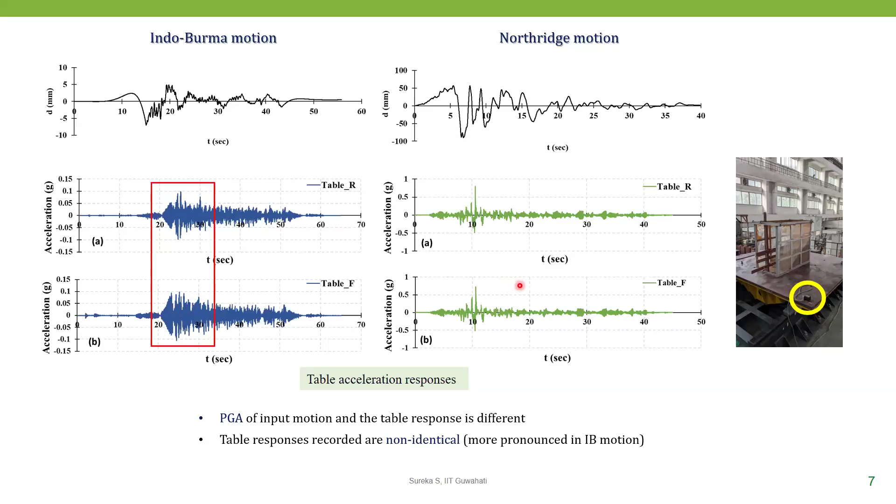Here are the figures of the reinforcement as well as the fascia models, pre and post shaking. At first we thought the reinforcement model would not be possible at all, as there is only partial confinement and the sand would move out. But upon construction, we realized that it is possible. The left one shows the pre-shaking reinforcement model, and the right one shows the failure model after the shaking.

During shaking, some of the sand mass rolled down towards the toe from the crest, as well as the sand sandwiched between the reinforcement layers, due to which a settlement of 4 centimeters is noticed in the top reinforcement layer, which can be seen.

We can see the fascia models before and after shaking. Here, the failure occurred in a way that there was loss of connection at the boundary, due to which the infill as well as the backfill moved out, and the soil mass near the fascia underwent settlement.

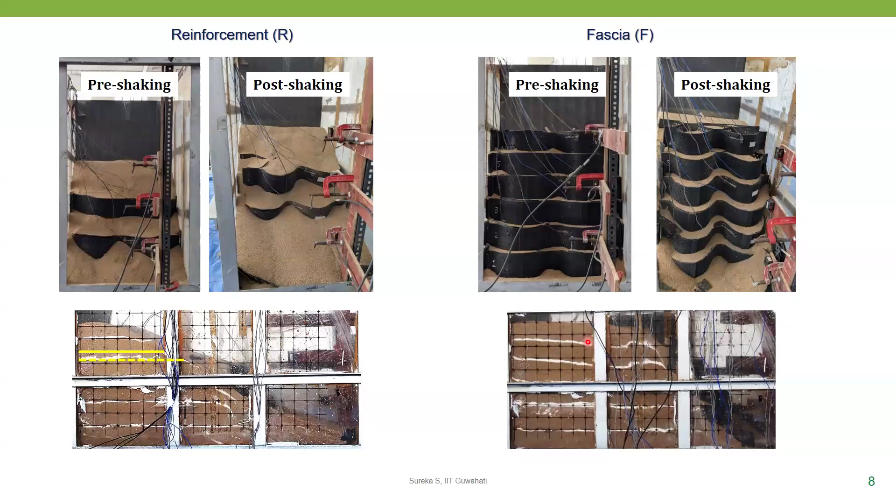Now coming to the acceleration amplification recorded in the fascia as well as the reinforcement configuration. The Indo-Burma motion, being the lesser PGA earthquake, amplified irrespective of the models, while in case of the higher magnitude motion, it de-amplified.

Looking into the difference in the responses, it can be seen that the reinforcement model forms the extreme, be it amplification or de-amplification, along the slope elevation. Whereas introducing the fascia has increased the stiffness, and also reduced the amplification-de-amplification bandwidth.

This amplification is calculated as a ratio of the PGA of the output motion or response recorded, with respect to the PGA of the input. Now proceeding to the displacement response.

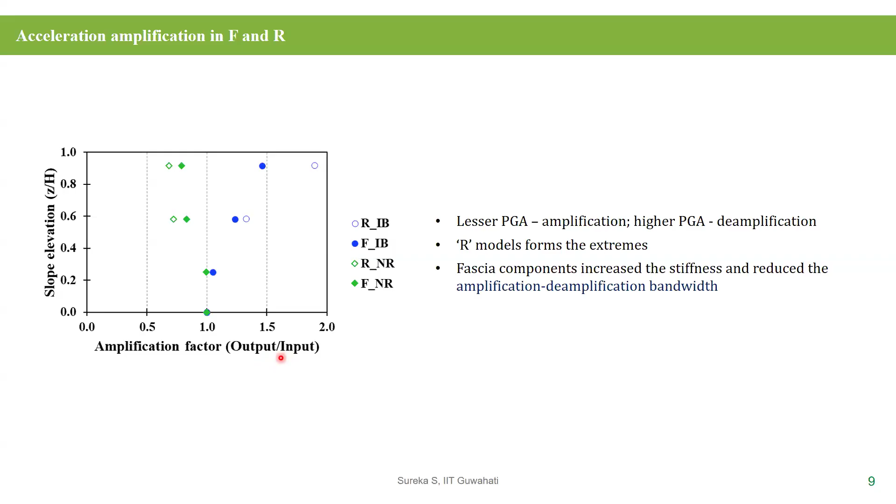Three displacement transducers are placed to measure the displacement of the model faces. In case of fascia, the transducers correspond to the geocell pockets themselves. Whereas in case of the reinforcement model, the bottom two transducers give the response of the geocell layer, while the top one focuses on the response of the crest, which is made of only sand.

The response can be distinctively seen in this displacement time history. The top one is for the reinforcement model. The maximum displacement was noted in the middle reinforcement layer, about 34 mm. The time history on the positive side of the axis corresponds to the crest, which is of sand.

It can be clearly seen that there is a distinct displacement recovery between peak and residual for the locations with the geocell pockets, whereas where only sand is present, the peak and the residual are the same. This is because during shaking, some of the sand mass rolled down towards the toe, causing the model to cave in at the crest.

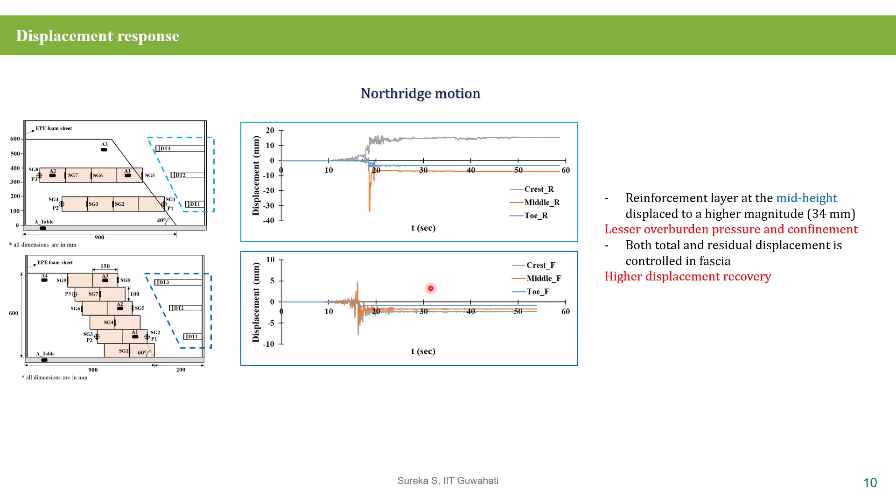Now proceeding to the strain development in the geocells under the earthquake motion. Only the response corresponding to the Northridge motion is given, because the one recorded under the Indo-Burma earthquake was very negligible. For strain development, comparison is made between the geocell layers present at the same elevation between the reinforcement and fascia models.

The strain development is such that the maximum strain was developed at the frontal geocell walls, where there is no confinement on one side and infill sand on the other side. As we proceed towards the interior, the strain decreases.

Now coming to the upper reinforcement layer and its corresponding layer in the fascia. In these responses, we can see that some curves are on the positive side of the axis, and some are on the negative side. The positive side shows tensile strain, and the negative side shows compressive strain.

Towards the upper elevations, only the frontal geocell wall was undergoing tension, while the rest of the geocell walls underwent compression due to the movement of the backfill towards the fascia, meaning towards the outer side. This is why we see some responses on the negative side of the axis.

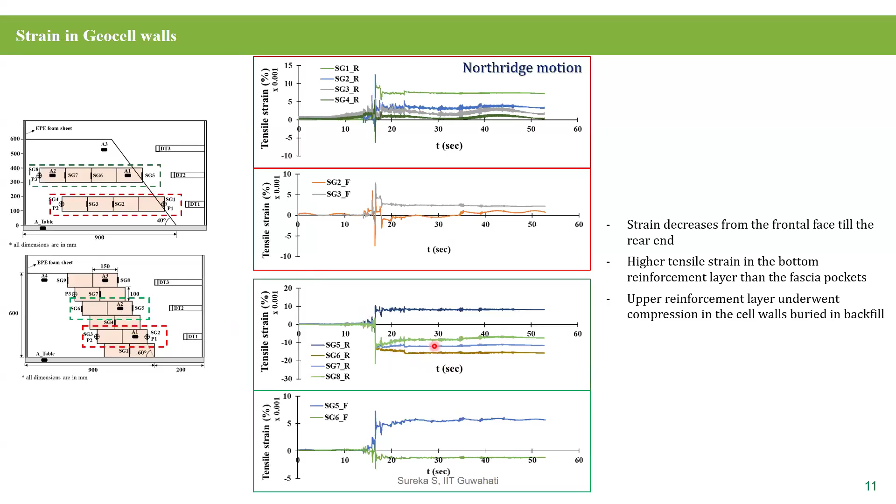This relates to the strain developed in the geocell walls when looking into the lateral stress exerted by the infill soil as well as the backfill on the geocell walls. This corresponds to the infill stresses. The infill stress exerted onto the frontal geocell wall is maximum for fascia, because there is uniform confinement throughout the slope elevation in fascia.

But in case of reinforcement model, the confinement is only partial. So some of the sand mass moved out, due to which there is only less incidence of lateral stresses onto the frontal geocell pockets, frontal geocell walls.

Now, when we look at the lateral earth pressure that is exerted by the backfill, here it can be seen that the compressive strain, whichever was seen in the previous slide, that is supported by the higher lateral stresses in this figure, in case of reinforcement models.

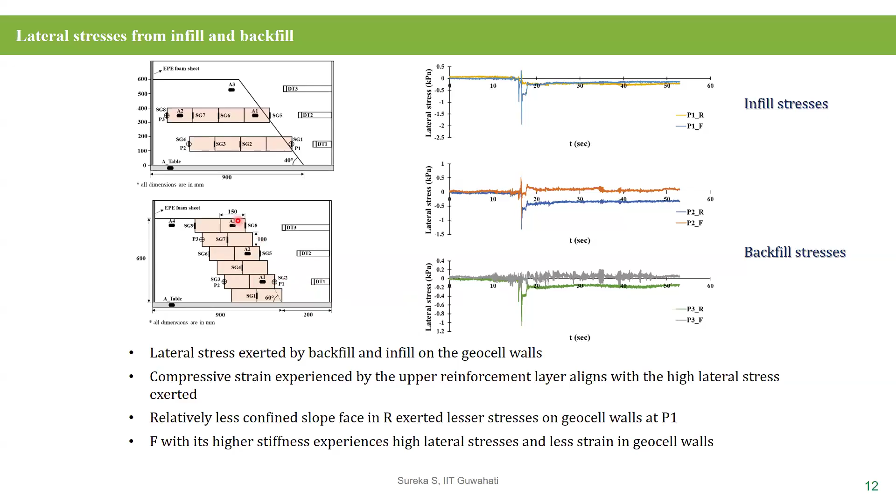So this indicates that the backfill is pushing the reinforcement layer, like the geocell layer, outwards. And in case of fascia model, it was noticed that even though higher lateral stresses are seen exerted onto the geocell walls, only lesser strain was taken by these geocell walls. This is because of the higher stiffness of the system and due to the uniform confinement throughout the slope face.

So in order to instigate nonlinear behavior in such smaller compact models, we have to scale down the properties of the materials that we use in the models, as well as it is necessary to scale up the motion intensity, the magnitude of the motions.

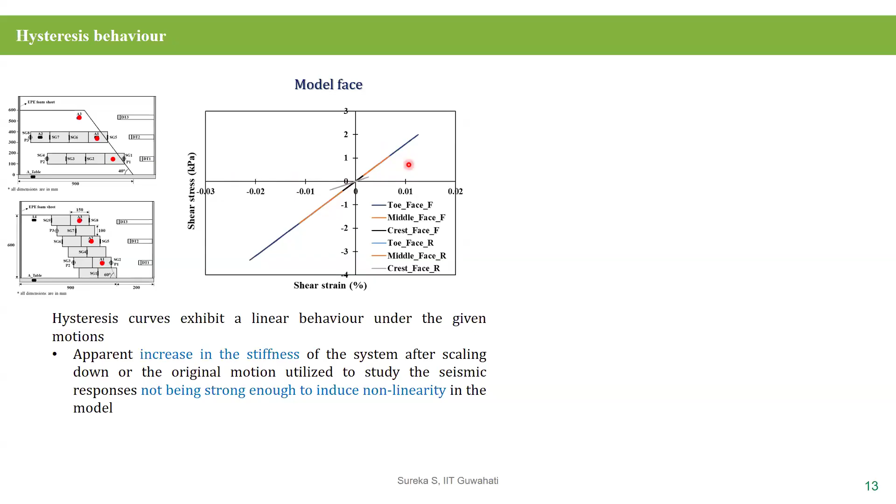Now, when we look into the response of the backfill, due to the increase in stiffness of the system in fascia model, there is higher range for shear stresses and shear strain, whereas in case of reinforcement, that provision is very much lesser.

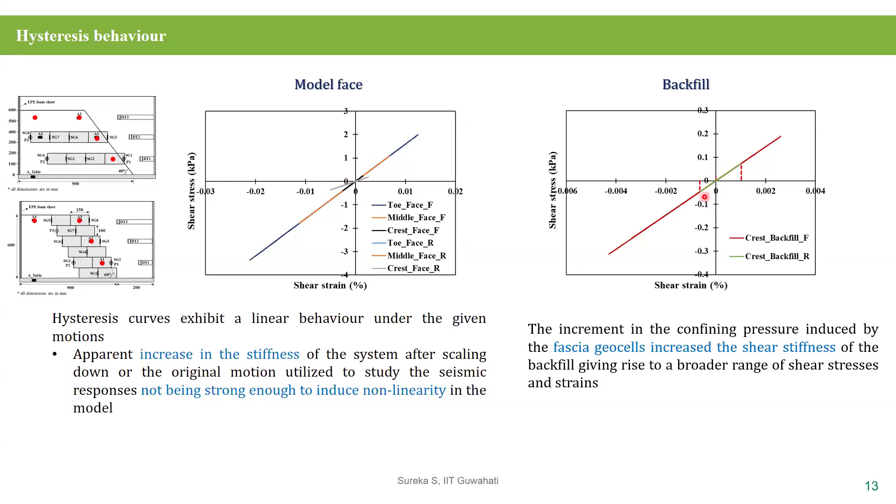Now in conclusion, in case of reinforcement, due to the non-uniform confinement, some part of the model was vulnerable to cave in, and since the sand was sandwiched between the reinforcement also moved out, there was settlement noticed. Due to uniform confinement in the fascia, there was lesser displacement, and we could see effective retention. In some parts, a geocell layer moved outwards due to the absence of interlocking friction above and beneath the geocell layers, whereas this was very effective.

The locking interfaces were present in case of fascia. And also, strain concentration was noticed wherever geocell layers are present, but again it was uniformly distributed throughout the fascia.

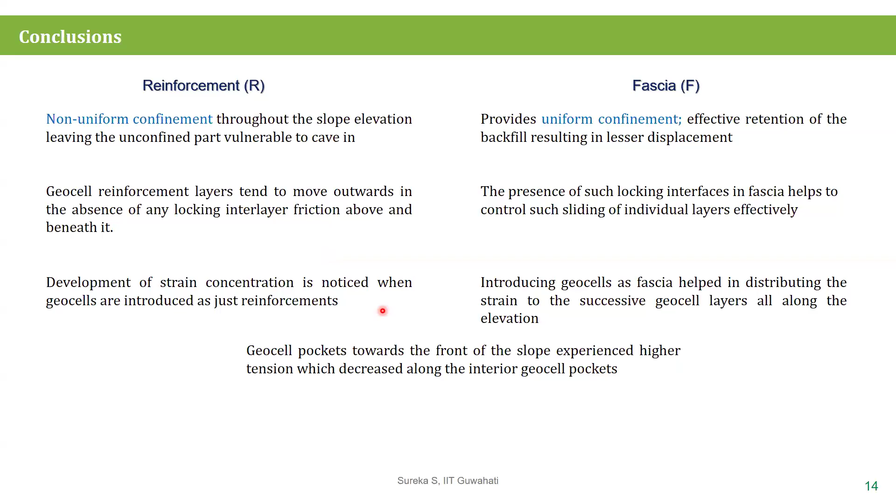Now, there is an advantage of reinforcement because these geocell pockets proceed further into the backfill, due to which there can be more stability. But due to the absence of fascia, this model was a failure. Now, when implemented along with the fascia, like both the reinforcement and fascia model combined together, the cons get cancelled out, and the system will function effectively under dynamic loading conditions.

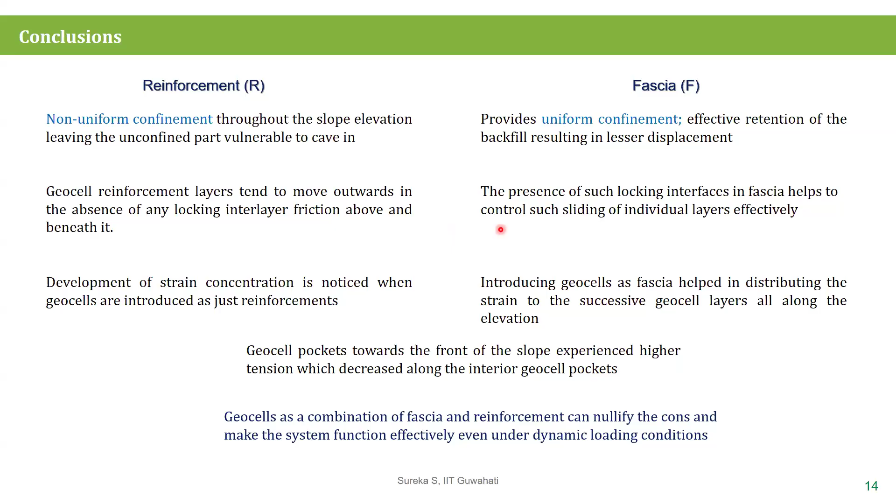So these are the results concerning the combined effect of fascia and reinforcement models, and are part of our further work, which is currently being communicated.